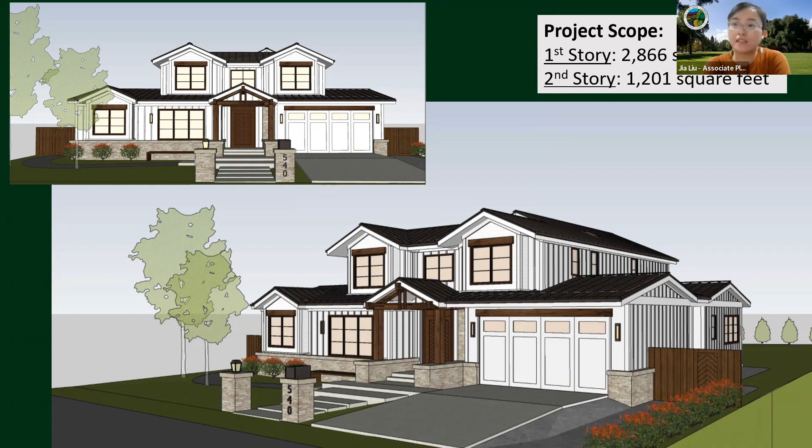This is for the construction of a new 2-story house at 540 Patrick Way. The project scope consists of 2,866 square feet of floor area at the first story and 1,201 square feet at the second story. The slide also shows two perspectives of the new house viewing from the street.

The project property is located on Patrick Way between Pine Lane and Los Altos Avenue, marked with a red star on this slide.

With regard to the characteristics of the neighborhood, it is a diverse character neighborhood as defined in the city's residential design guidelines. Homes in the immediate neighborhood are a combination of 1-story and 2-story homes, with 6 2-story homes nearby. Properties share similar front setback patterns with low to moderate scale horizontal eave lines for both first and second story, and most garages are attached, facing the street. Roof forms are a combination of simple and complex roof lines due to renovations over the years. A mix of roofing materials are found, including wood shake, composition shingles, and tiles. Exterior materials include stucco and wood siding with stone veneer or brick accents.

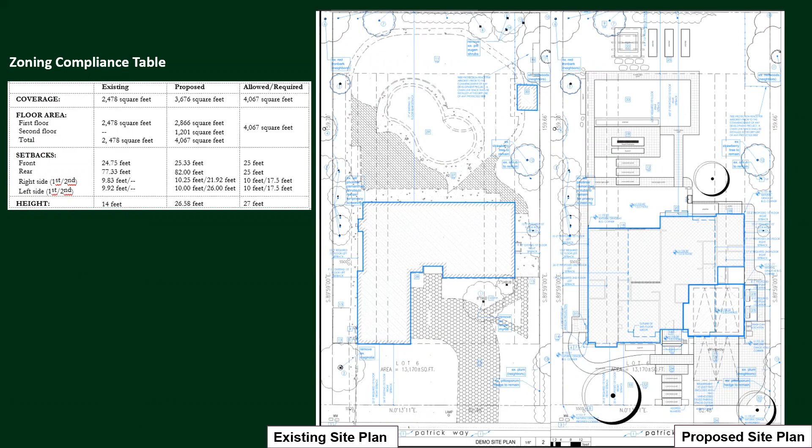This slide provides the site plan, with two plans included: the existing site plan to the left, and the proposed site plan to the right. The proposed first story is outlined in the bolded blue line, with the second story in the blue dash line. Staff also highlighted the second story in green for reference.

Compared to the existing site plan, the proposed structure's footprint will remain at the approximate location within the first half of the lot. The proposed setbacks will be at least 10 feet for the first story and at least 21 feet for the second story. Rear setbacks are 82 feet for both first and second story. The house is found consistent with all R1-10 zoning district standards, including but not limited to lot coverage, floor area ratio, and height limit.

Staff also want to clarify that, as I'm taking this project over from the previous planner, I don't believe there's a detached ADU proposed on the site plan. As the applicant is here, they may further explain this when they have a chance to present.

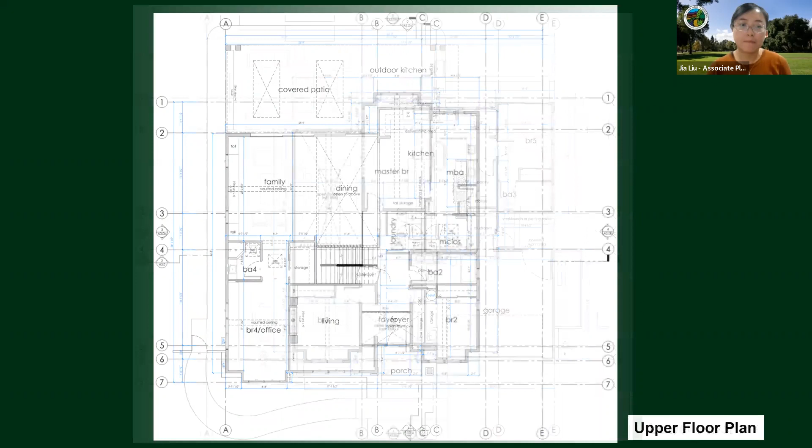This is the second story. There will be 3 bedrooms and 2 full bathrooms. All bedrooms will be front-rear orientation with limited side windows.

The project also utilizes high-quality materials such as standing seam metal roof and wood window and door with wood trims, integrated into the overall architectural design.

With regard to plate height, at the first story 3 wall plates are proposed for the living room, including a main plate height of 9 feet at the rooms along the front elevation and the kitchen area. The second plate height will be 9 feet 6 inches at the family room and bedroom 5. The last plate height will be 12 feet at the dining room facing the rear yard. For the second floor, the proposed major plate height will be 7 feet 6 inches, except for an 8-foot plate height at the master bedroom.

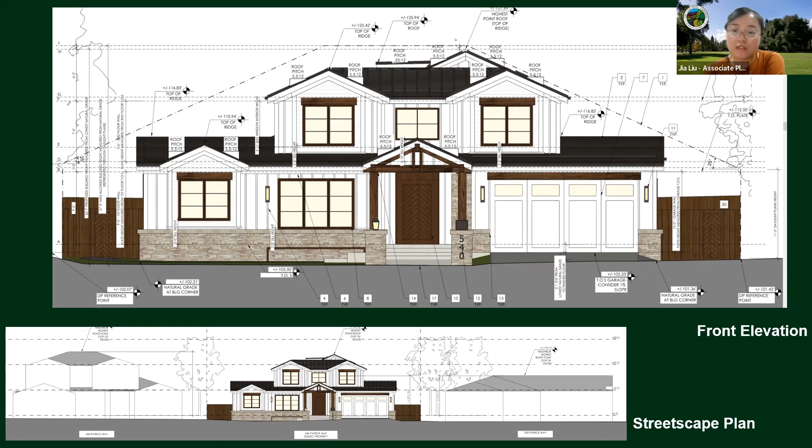Staff want to assure that after publication of the package and before the meeting, staff received an alternative design proposal from the applicant for the second floor plate height. Staff will leave this to the applicant to explain further when they have the chance to present.

So 2 windows at each edge of this left side elevation have window sill heights of 3 feet and 3 feet 6 inches respectively. The third window is a large 3-panel horizontal window at the master bedroom, designed as a dormer window.

Also to clarify, additional windows shown on these 2 elevations in gray and brownish color are skylights on the roof. The proposed window sill heights of 3 feet and 3 feet 6 inches are not normal sill heights that the commissioner would normally see. However, staff consider the proposed window design acceptable for the following reasons.

Reason number 1: the second story design features a low plate height and eave line. The proposed sill heights are proportionately designed to support the second story function. If a standard 4 foot 6 inch sill height were required, staff believes the windows would not be proportionate for each room.

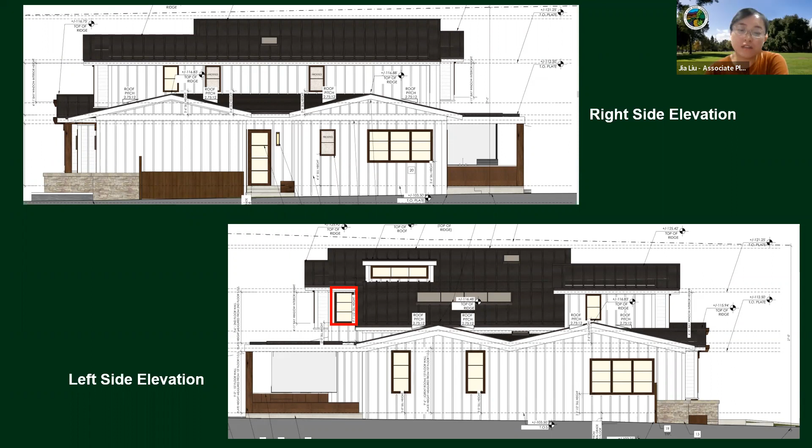The next reason is that along both side property lines, the applicant proposes to retain the existing evergreen screening vegetation and plant new screening vegetation, which staff considers will mitigate privacy impact. Finally, per the neighborhood feedback in attachment E, neighbors on both sides do not appear to have privacy concerns regarding the design of the second-story windows. Therefore, staff considered the side elevation design has incorporated measures to mitigate privacy impact and found the design acceptable.

An additional large fenestration next to the master bedroom window is designed for the double ceiling height at the dining room area, which will not cause any privacy issue as the dining area is only one story. All windows will have at least an 82 foot rear setback, and staff find this distance mitigates privacy impact to the rear neighbor. Also, existing mature evergreen screening vegetation along the rear property line should further mitigate the privacy issue.

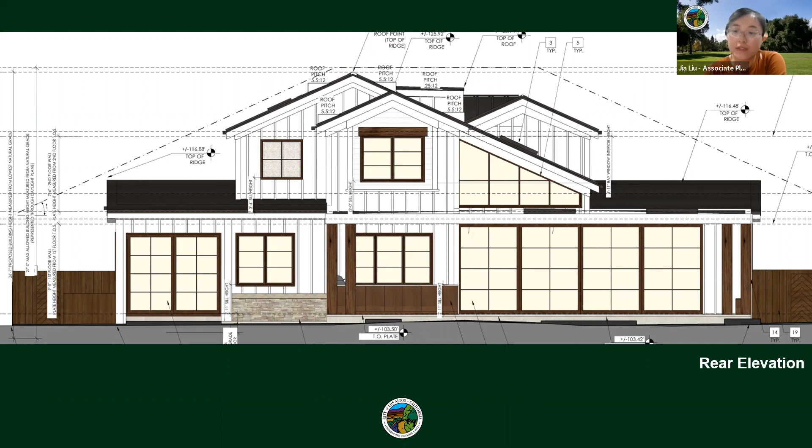Other trees and existing screening vegetation will be retained on site with proper tree protection during construction. 3 new trees with 24-inch box or 36-inch box size are proposed throughout the site as part of the landscaping plan.

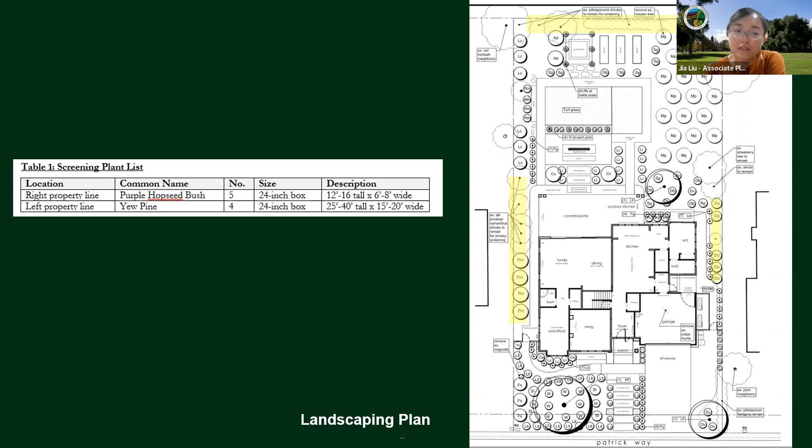So with all the information presented, staff now recommends the Design Review Commission approve design review application SC 22-0003, subject to the listed findings. Staff now concludes the presentation and is more than happy to answer any questions. Thank you, Jia.

Commissioners, any questions for staff? None from Sam. Michael? No, I don't have any question. Frank? I'm good for right now.

Okay, Jude? Just a quick question. Jia, you might not know the answer, but it looks like this was the original submittal back in January of this year, with numerous revisions. So I'm just curious, what have been the issues over the last 8 or 9 months to get to here?

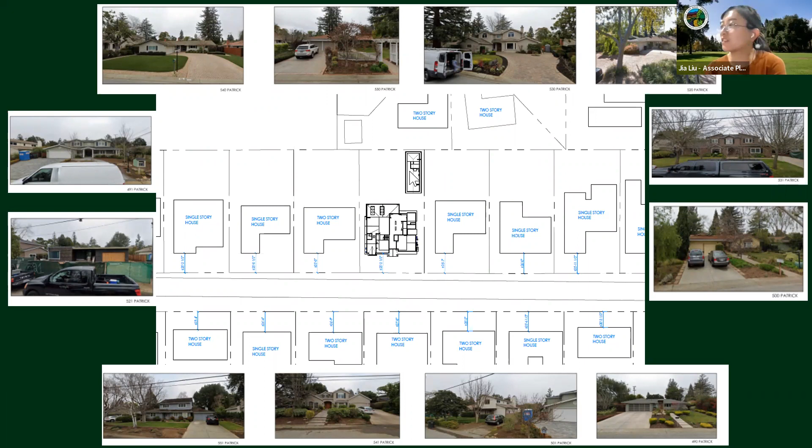So, you mean the site plan? No, there was an area plan showing the areas, the neighborhood. Yeah, so I took this plan from the first submittal, and I didn't take a careful look at it. I was not aware there was an ADU proposed at this corner. But for this application for the approval tonight, there's no ADU proposal anymore. There's a swimming pool in the middle of the rear yard.

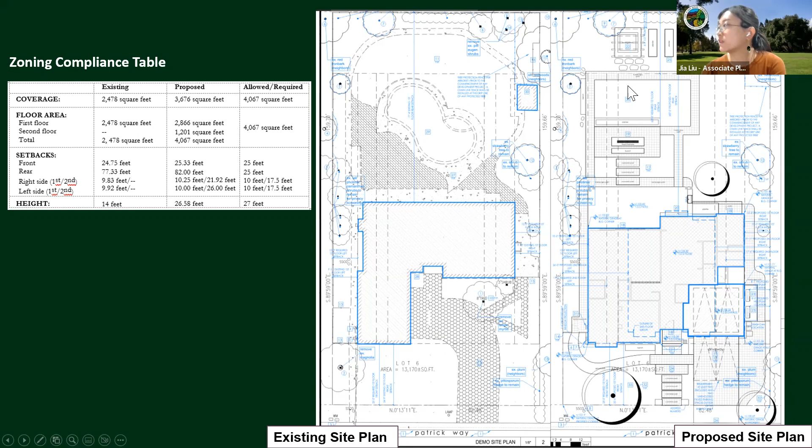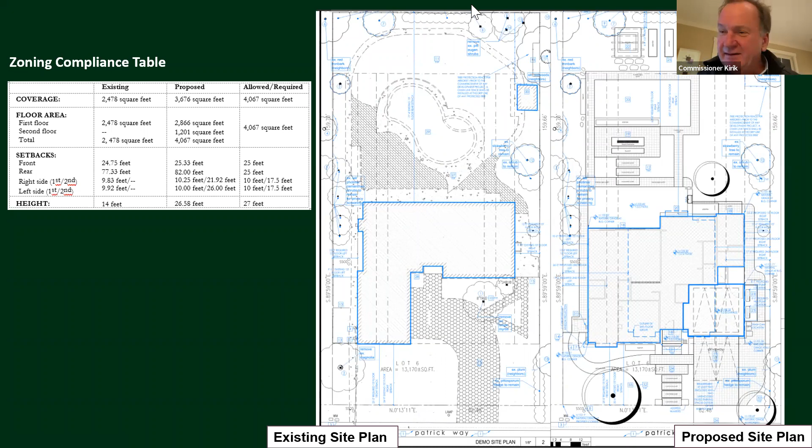Yeah. Okay, so last question. Just so I know, we have no purview of the ADU, but when it comes to impact on adjacent property owners' trees, what is the review process for impact on a neighbor's tree when somebody builds an ADU? So staff would also require the arborist report to assess and provide a tree protection plan.

Sometimes the arborist would do exploratory work, like some trenches along the proposed foundation of the ADU, to see what the roots are like. If there are major impacts to the tree, staff will recommend alternative foundation design or an alternative location for the ADU in order to protect the tree. Okay, so you are paying attention to tree protection when you're reviewing the ADUs.

I would also like clarification from the applicant, because I'm not sure if the ADU is still ongoing as a separate application. This is just for my education, so just humor me. Yeah, if there is a separate ADU application, then definitely staff will review the tree and the tree protection plan. Thank you.

So just to clarify, there are still municipal code requirements under the tree protection ordinance. In general, we look at any protected tree, those over 48 inches in circumference, and if there's any improvements within two-thirds of the drip line of the tree, that's where the concern is usually elevated — that's the sensitivity zone we look at. Regardless of what type of permit, whether it's a ministerial action staff is taking, discretionary design review at the staff level, or in the case of the DRC, there is municipal code that applicants have to comply with.

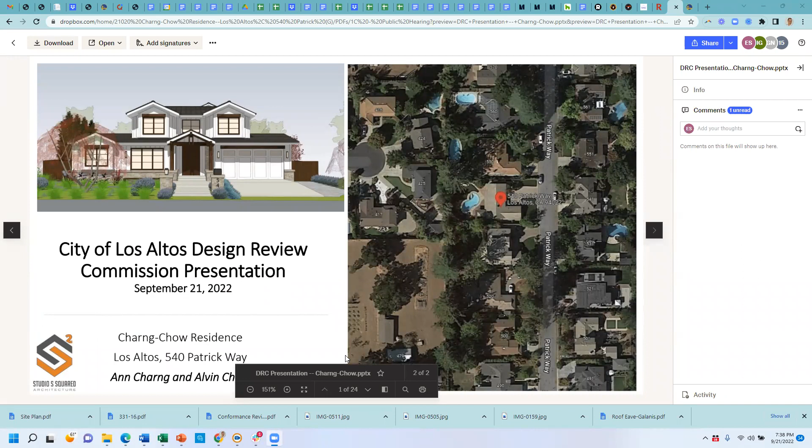Go right ahead. So because we were proposing a new 2-story home, the owners really wanted to reach out to their neighbors to see if there were any privacy concerns they may have and to see if there was any way we could mitigate these concerns.

Because of this, they went around to the neighboring residences and dropped off plans as well as the letter that was located there. And here you can see highlighted are the neighboring residences that they dropped off plans to.

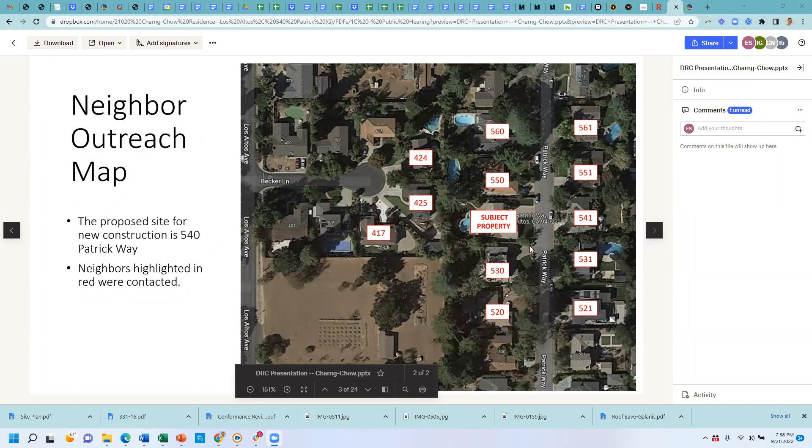And here is a summary of those outreach efforts. You can see the homes highlighted with the speech bubbles - the neighbors were actually present at the time that they went to drop off these plans, and they spoke with them in person. The home highlighted with a circle, the neighbor was not present, but did follow up later with an email. And the homes with an X, the neighbors were not present and did not follow up via email.

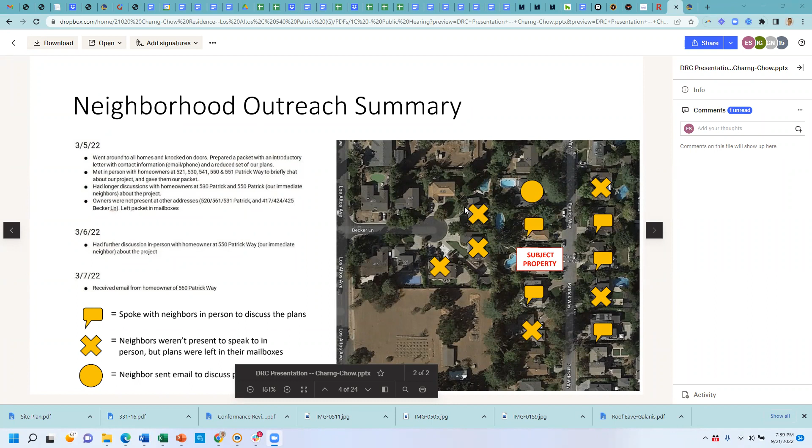So the residents at 530 Patrick Way, which is immediately to the left, they actually did a remodel to add a second story to their home recently. And they were also the selling agent for the subject property, so they knew a rebuild was coming and they have no problems with the 2-story home.

The neighbor at 550 Patrick Way expressed no concerns with the 2-story aspect of the home either. The neighbor at 521, they spoke to when the initial outreach was done - these homeowners also did a rebuild themselves and offered to share some tips about the process. And finally, the neighbor at 560 sent a nice welcome email afterward and said the plans look lovely and they wish for a smooth construction process.

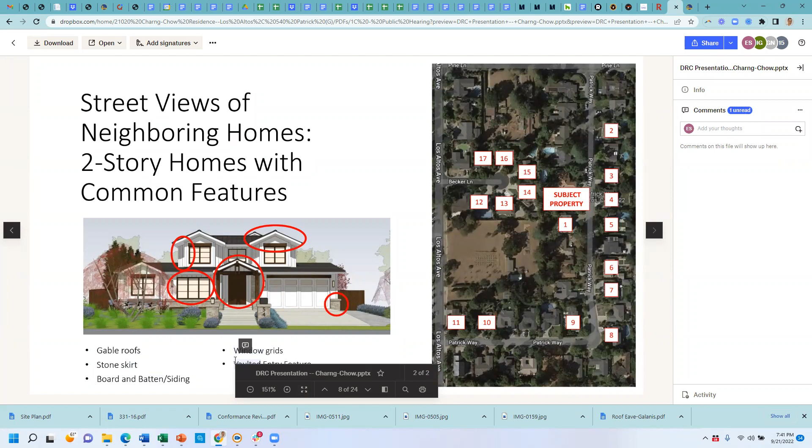And here you can see some of the 2-story homes, and we've highlighted some of these aspects, including the gable roofs, the grids on the windows, board and batten siding, or some sort of siding.

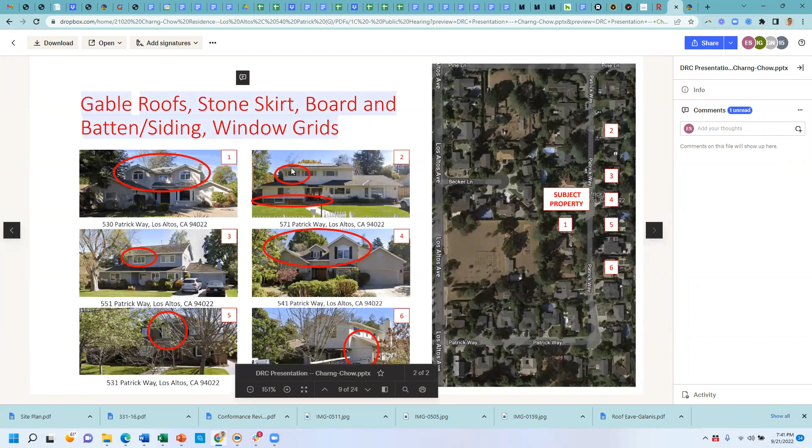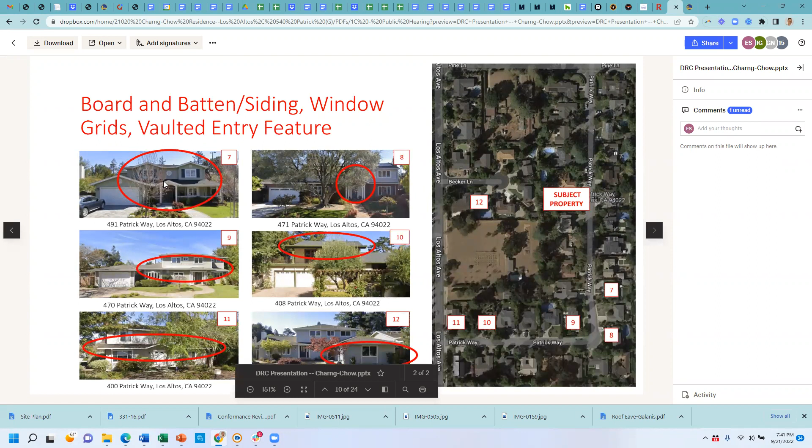And here are more of the 2-story homes. Again, we've highlighted some of those features, including several vaulted entry features, gable roofs, siding, grids on the windows, etc. And this is the last set of 2-story homes where, again, we've highlighted those features despite the diverse character of the neighborhood.

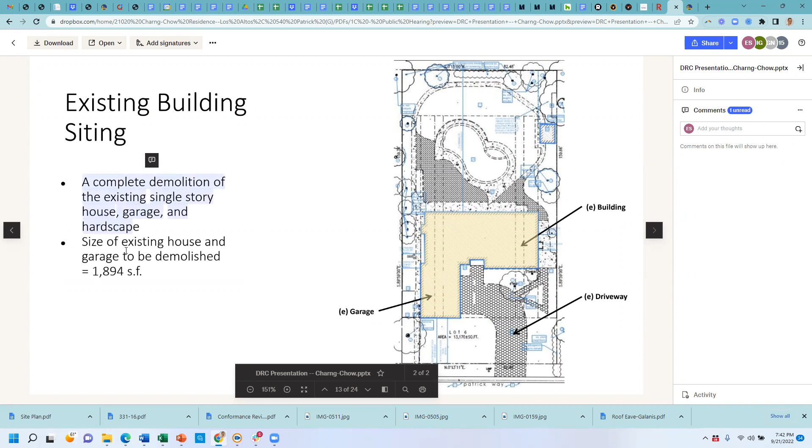And here is the proposed building. We're proposing 2,373 square feet at the first floor, 1,201 at the second, and a 490 square foot garage. As you can see, we've also mentioned the setbacks we're proposing. Notably, the rear setback we are proposing is very large, and the second story side facing setbacks are quite considerable as well.

There was mention of the ADU previously. That was part of the initial submittal, but we have gone through several design iterations and it is no longer being proposed.

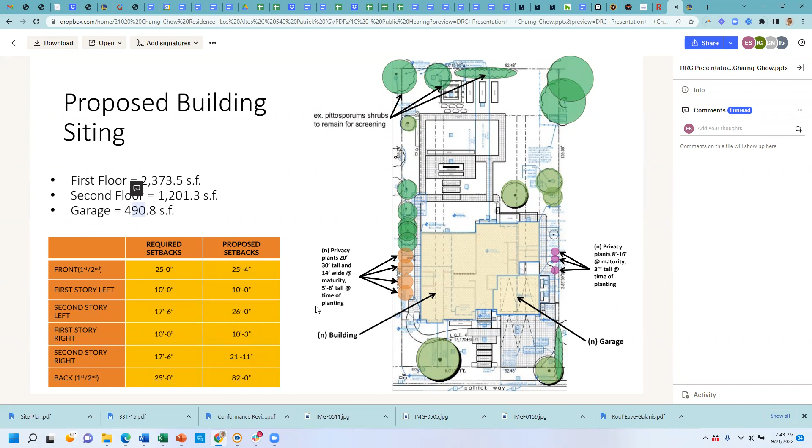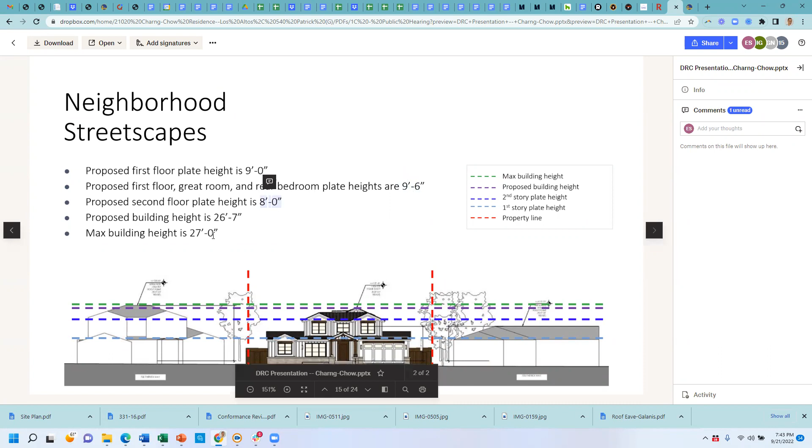So we are proposing 9-foot plate heights throughout the first story, going up to 9'6" at the rear great room and rear bedroom. And then there is that 1.5 height space at the dining room as well that you mentioned. We are proposing 8-foot plate heights, which I will be going further in depth on, at the second story. This results in an overall building height of 26 feet 7 inches, which is below the 27-foot max.

We're proposing high quality and durable materials. These include natural stone skirt, standing seam metal roofing, board and batten siding, and wood framed doors and windows.

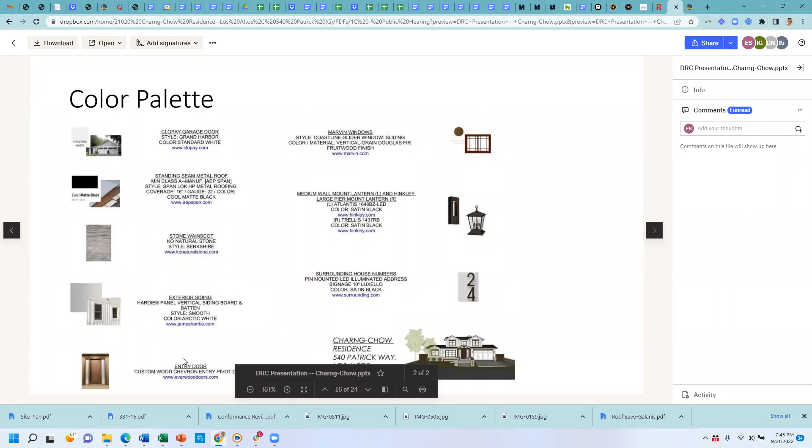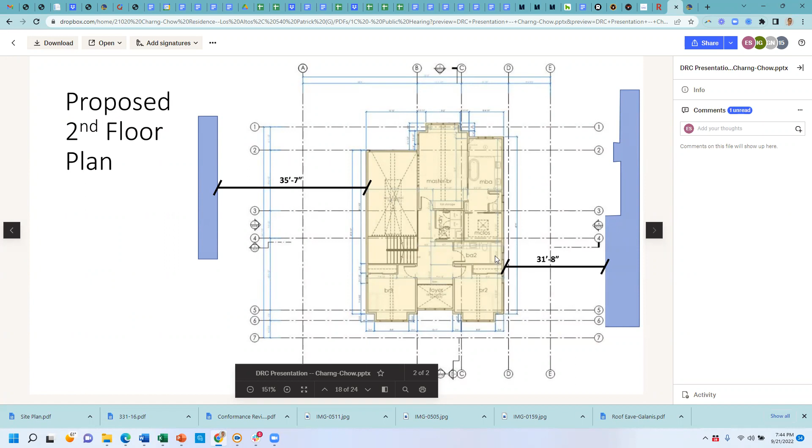As Gia mentioned, she had raised some concerns about the second story side facing windows. Because of this, we modeled the two neighboring homes as well as their window locations, and we designed the privacy screening around this in order to mitigate any privacy impacts.

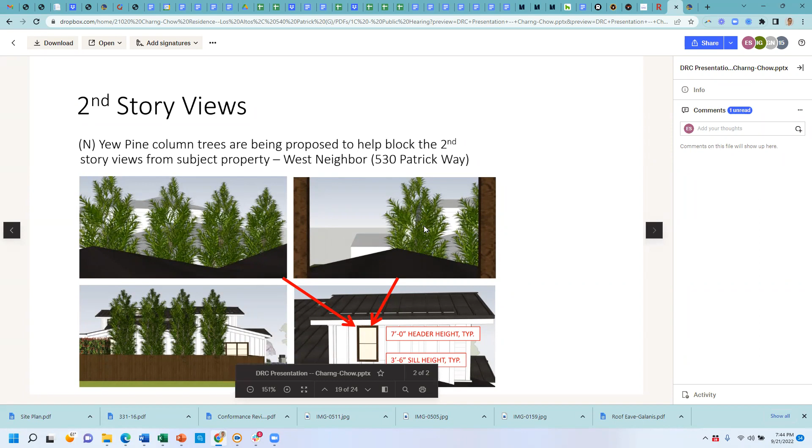So this window shown here is the one at the front on the front left side bedroom, bedroom 3, I believe. As you can see here, the privacy screening that we are proposing, also coupled with the location of the window towards the front of the house, mitigates any privacy impacts.

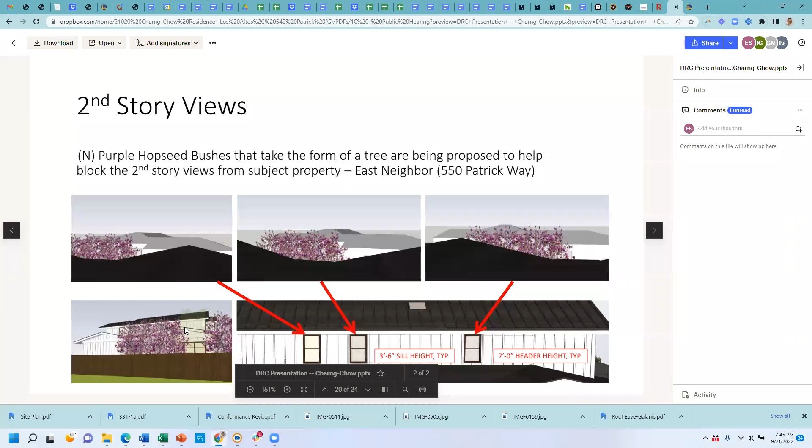And then here are the 3 other windows on the other side. The front one is at bedroom 2, then bathroom 2, and the master bath water closet respectively. The 2 in the bathroom, we are proposing obscured glazing on. As you can see here, we've designed and located the privacy screening in order to mitigate any angle of views from these windows to the windows on the neighboring residence.

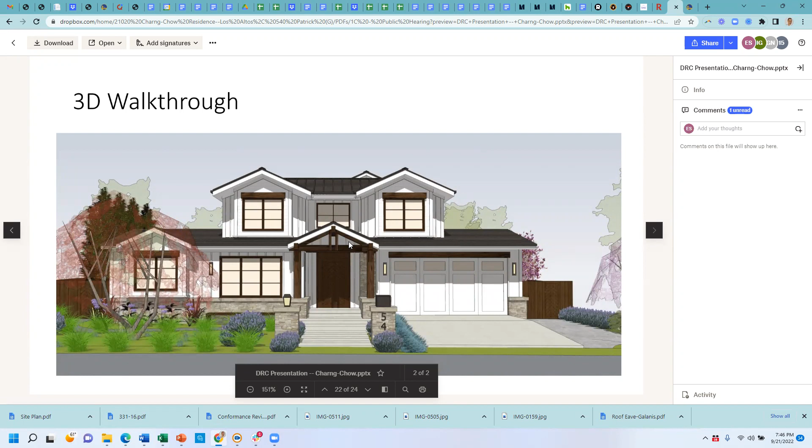This slide was supposed to be a walkthrough through the 3D model. Since I'm having trouble showing my screen, I'll just talk generally about the style of the home. It is the modern farmhouse home. You can see the high quality materials such as the stone skirt, the board and batten siding. We've incorporated some warm rustic elements to give it character, and you can see the grids on the windows as well as the front facing gables.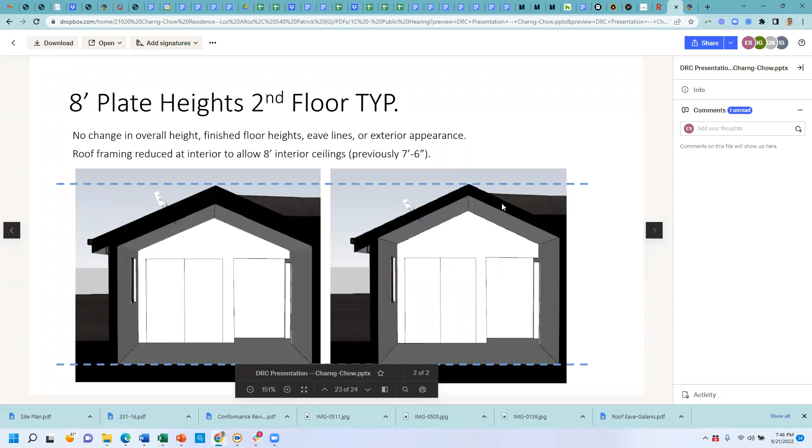Let's go ahead and open it up to commissioners for questions for the applicant.

Sam, you want to begin? Yes, I did get into... there you are, some magic happened. I can't see myself, but I can see you. So I have no comments. Okay, Michael?

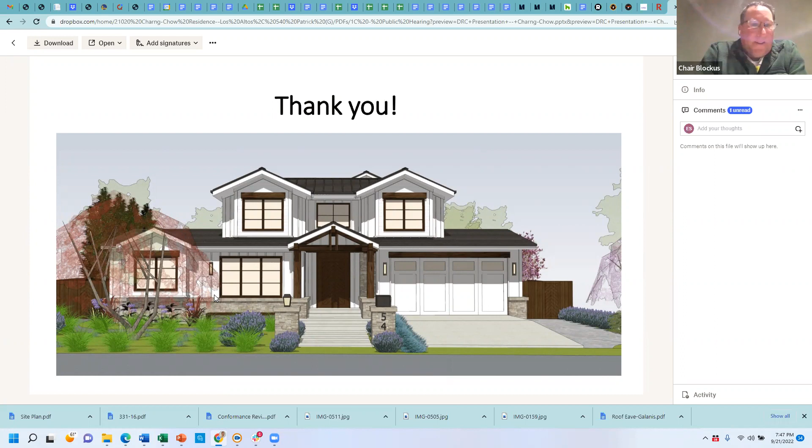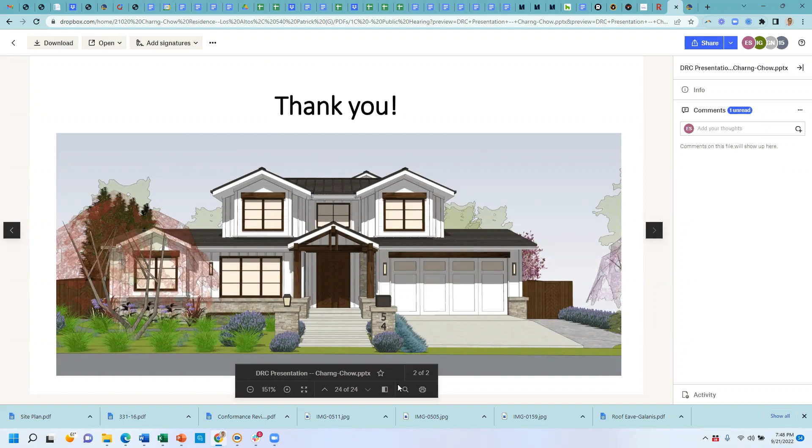Yes, I do have a few minor questions or comments. On the front elevation window, A 3.0, above the porch roof, it looks like the window has some conflict. I'm not sure if it's perspective or the bottom of the window, but it's actually touching the top of the roof. I just want to remind the architect that you may have to raise the sill a little bit to avoid the roofing bumping into the window.

My second question is that there are some window headers shown on the elevation, two on the second floor. Are those stained wood? I don't see any keynotes to point those out. Are those part of the window assembly, or are they exposed headers that are painted or stained wood?

My third question is on the material board, you indicate the window is Marvin coastline wood window, but I looked it up and Marvin coastline seems to only be available in Florida or the southeast coastal region. It's for harsh coastal weather and those look like aluminum or metal. But on your material board, you say coastline Douglas fir. So can you clarify the window for me?

Thank you. So we are proposing wood windows. Marvin's line, that might be a typo. I don't recall the exact line off the top of my head to confirm, but it is the Marvin wood clad windows. The header you talked about is purely decorative, but it's meant to give the sense of an exposed wood header. The other question was about the window over the entry feature - that is perspective, it is a bit above that roof, but that's something we'll continue to study during design development.